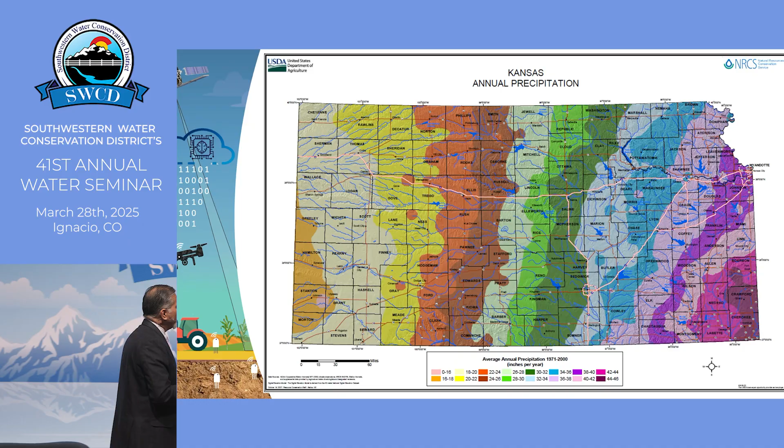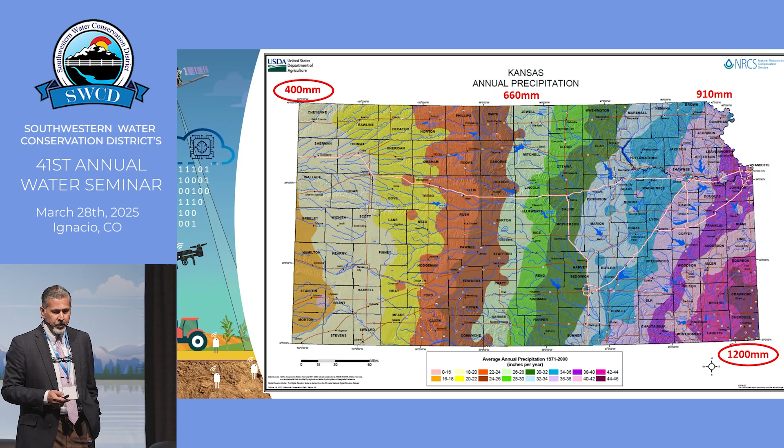My clicker is coming back to me. What I want to share with you is the precipitation distribution in Kansas. It goes from, forward please, low 400 millimeters, so that's just 10, 11, 12 inches, and all the way very high as you go east. By the time you get to southeast Kansas, it goes up very high to 1,200 millimeters, so we're talking more than 45 inches of precipitation. But as you come closer to Colorado, you all are very familiar with that, and that's not different. Wheat is one of our major commodities.

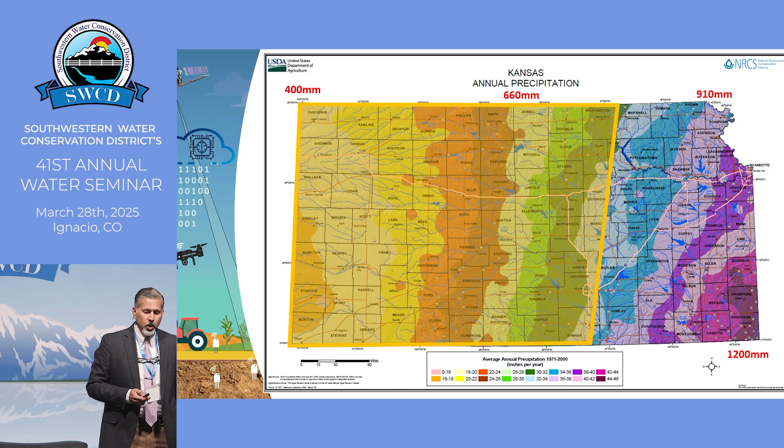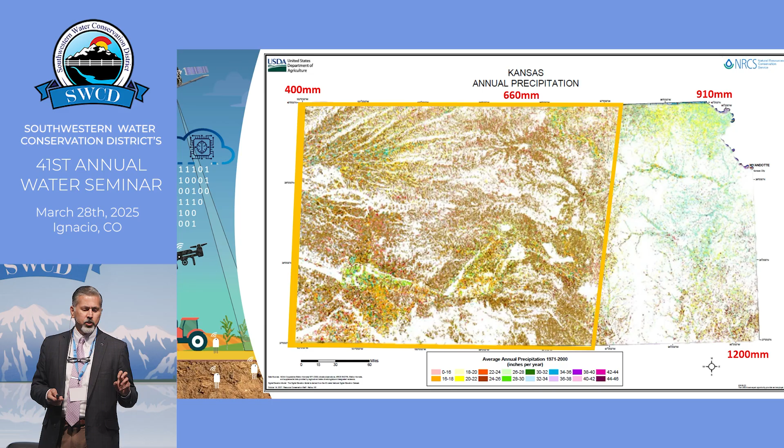But I want to share with you where wheat is grown. Wheat is grown in the western half of Kansas, and that's where it's water deficient. But we happen to be sitting on the Ogallala Aquifer, one of the world's largest freshwater aquifers, and you can see by looking at these pixels, these are the GIS pixels where wheat is grown. And this is the current status of Ogallala.

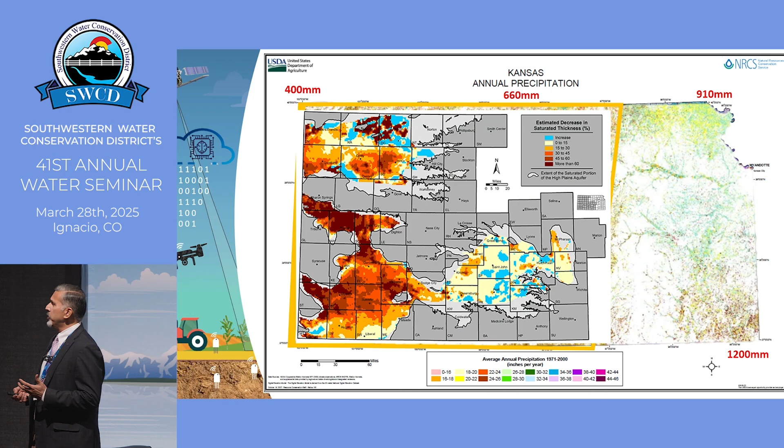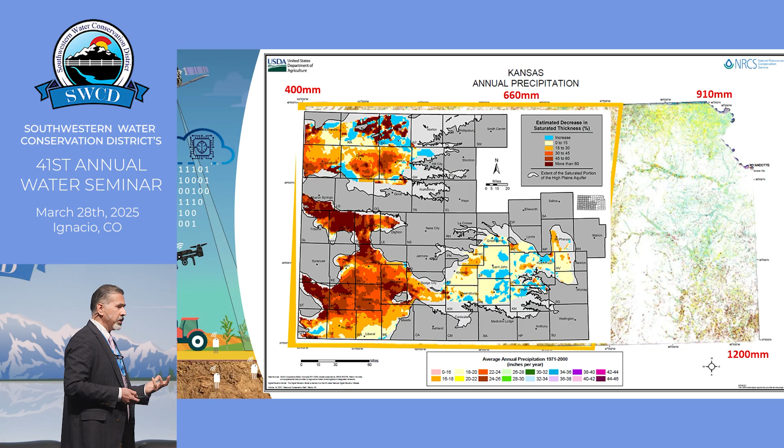So water is very precious for Kansas as well. I know water is very precious in Colorado, I have learned that very carefully. So all the dark brown and orange that you're seeing, that's where Ogallala has receded more than 60%. And when you think about the frequency of droughts that we're experiencing right now, it's not going downward. So something's got to change. What would that look like?

Okay, so precision agronomy or best practices are very important to Kansas. In fact, agriculture is our largest industry, 42% of GDP relies on agriculture. These are some of the commodities that we grow. So I just want to set the stage that water is important, not only in Colorado, but in many other parts, and it's a precious resource.

I'm now going to switch gears and ask you to imagine. I want you to imagine how agriculture may look like in 25 years from now, by 2050. What would be your answer? Drier.

Moving north. Smaller. Resilient. Now we have some optimists in the crowd. Resilient, that's what we're talking about. Well, none of us have a crystal ball.

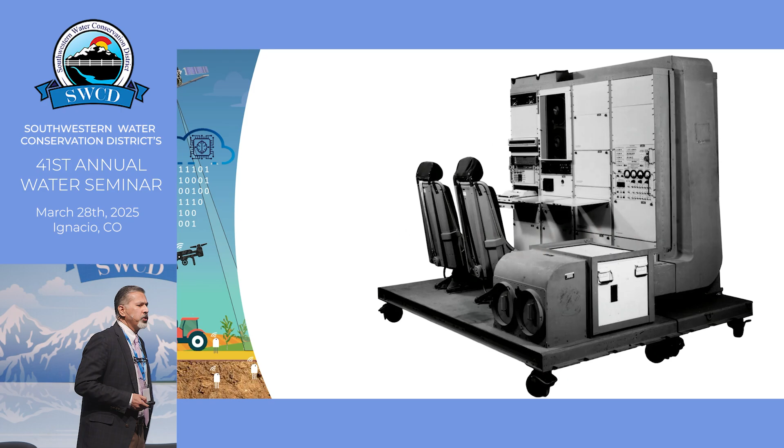It's very hard for us to predict what's going to happen in the future. But Elaine and the organizing committee reached out to me to talk about how we're going to embrace artificial intelligence in agriculture. So instead of looking into the future, how about we look into the past? Here's a picture for you.

You have to speak louder. I heard somebody say computer. Yeah, and it has wheels on it, so it must be a mobile computer.

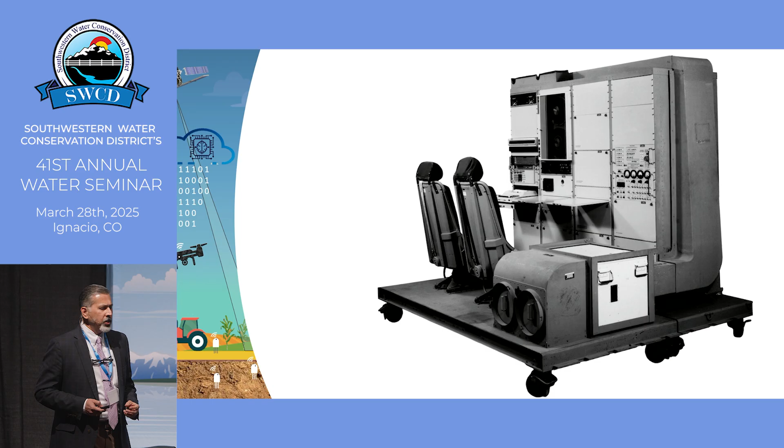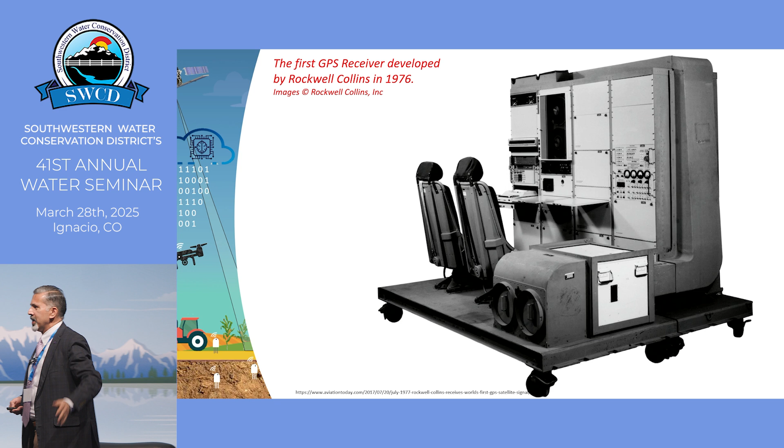Well, it turns out that this is the first global positioning system receiver that was put together in 1976 by Rockwell Collins. Now, how many of you use GPS? Come on, everybody's carrying that in your pocket. Even the scientists at NASA had no idea that in less than 20 years, this one GPS receiver would fit maybe one on the stage, and now you can hold it on the tip of your finger.

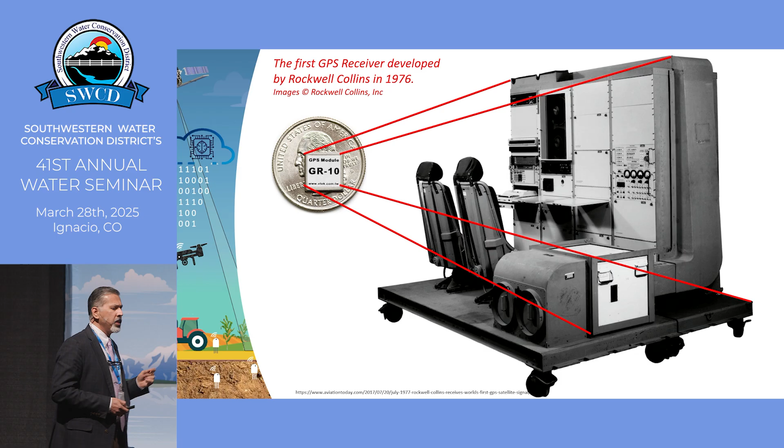And if you bought a cell phone after year 2000, it's there. It's everywhere, right? It's in your cars, it's in your cell phone, and lots of other things. So this is one of the first units that were put together for military warfare, a GPS unit used by our soldiers. And this is one of the makeshift units.

This is me working in northeastern Colorado, late 90s, using a Trimble unit, and I have a tackle box on the back with multiple deep cycle batteries. I'm wired up myself, wearing a Velcro belt with the analog data logger in those days, and I'm using an RS-232 port to connect that to the GPS, going across the field measuring nitrogen stress in crops.

Well, we have come a long ways since then, haven't we? Somebody said resilient.

Everybody knows Einstein, right? And he said imagination is more important than knowledge, and I couldn't agree more. Because think about it, what started as an idea in the late 1980s was put together by this person who's the father of precision agriculture, the late Dr. Pierre Robert.

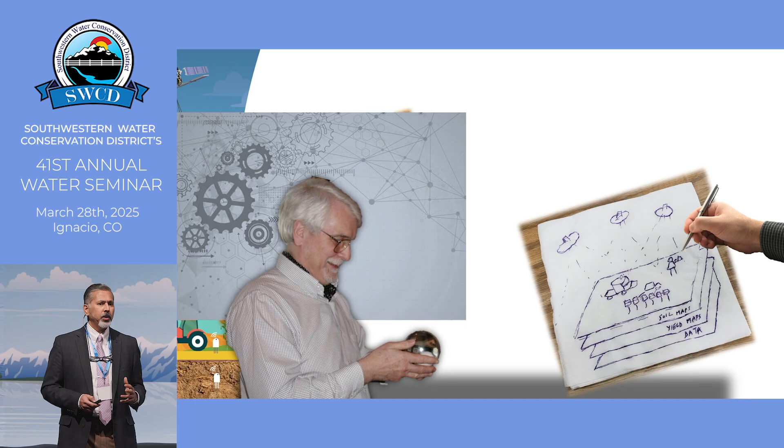In a meeting like this, during that time, there was a lot of talk that GPS is going to be available for civilians. And so the thought process was that one day when GPS becomes available for agriculture, we're going to connect everything that we do in agriculture with GPS. And then this schematic from a napkin was put together by a designer, and this has happened. What we're doing in agriculture today has connection to GPS.

Location is important. But the founders of GPS cautioned us. They said when you start doing location-based agriculture, you'll be collecting lots and lots and lots of data. And they're right.

Today, for those of us who are engaged in agriculture, whether you know it or not, you're collecting lots of data. Whether it's past year yield, or what's in the soil, or different soil profiles, there's a tremendous amount of data, and I'm going to show you some examples. So as you look into the future, data and data analytics will be integral for the success of agriculture.

Some of you may have read the USDA Agriculture Innovation Agenda that came out in 2020. It talks about how in the next 30 years, by 2050, we're going to increase our ag production by 40%. Now, how many of you think we can get there? Show me a raise of hands. Okay, there are some pessimists in the crowd.

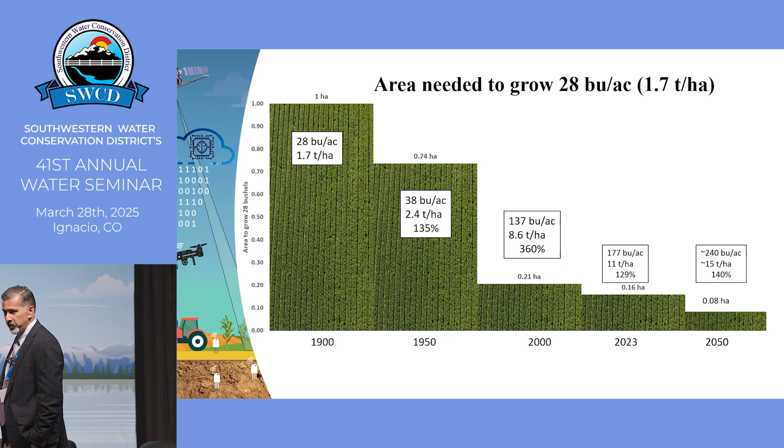What has happened in the last 25 years? It has come down further. So to translate this into what the USDA Agriculture Innovation Agenda calls for, by 2050, with 50% less water and 50% less nitrogen—this is a very tall ask, but we have to be ambitious. We have to aim higher. How would we get there?

And this is where I put as a hypothesis, could artificial intelligence play a role in helping us bridge that gap? How do we get there?

Let's take a look at what is intelligence before we talk about artificial intelligence. Intelligence is our capacity to retain a tremendous amount of observations, use our logic that we come up with from observations, emotional intelligence, learning and observations, more observations that we continue to integrate. And it starts right from our childhood. Our ability to fit through shapes and sort them, which comes with observations, sensing, ability to read, ability to write - this is all where intelligence is being formed in our mind. Ability to walk, ability to bike, observations, learning, logic, abstraction, ability to solve problems, ability to solve complex problems. It's total observations all the time, infusing logic into that.

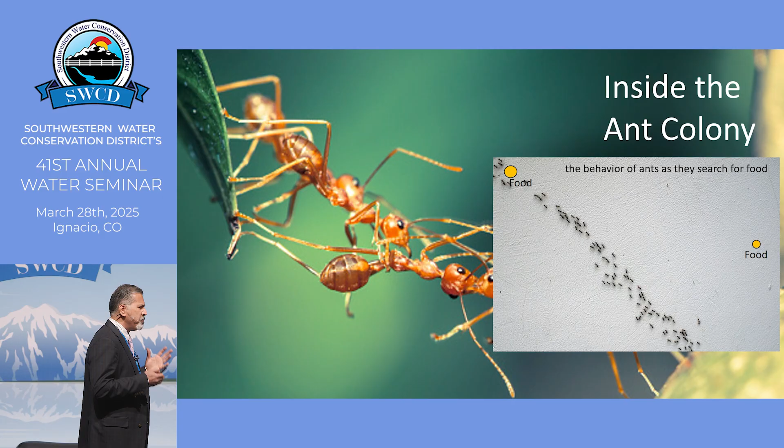And we're not the only species that's gifted with intelligence. There are so many other animals - for example, how ants will navigate towards food in a very organized manner, or elephants, dogs, pigeons, orangutans, crows, pigs, dolphins. The list goes on. Last year there was a paper published in one of the world's top journals of science.

But Alan Turing, the father of artificial intelligence, started this whole paradigm: can machines think? And what would that look like? He started in 1950 a totally new domain of intelligence called artificial intelligence. And of course, computers are machines, and the idea there is that can they mimic human behavior?

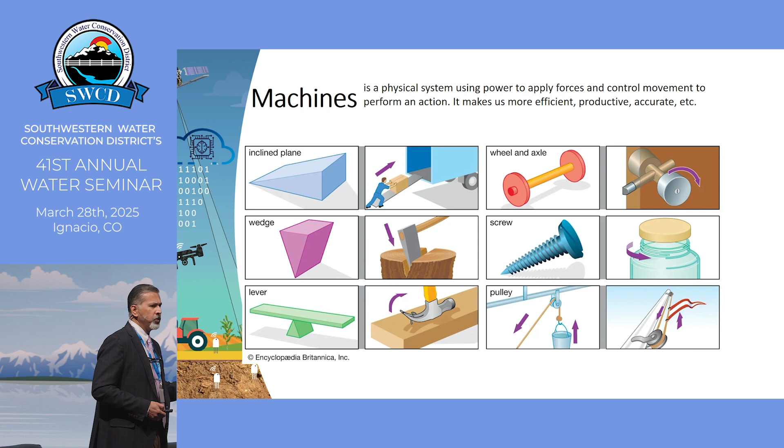That's the key question. And our fascination for machines is not new - all of these are examples of machines. How many of you knew that the glass sitting in front of you is a machine? You go to a river, you're thirsty, what are you going to do if you don't have a glass? It allows us to do more, right?

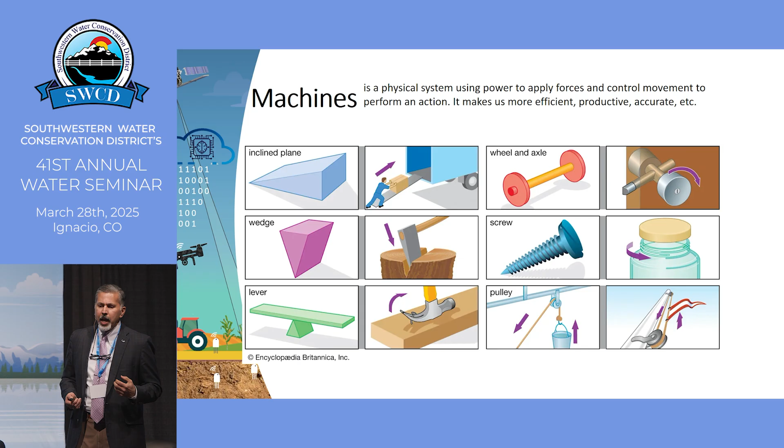So here are some 21st century machine examples being used in agriculture. Most of them are robotic farms, and they're mainly focused on weeding. Farmers have very little tolerance for weed - it sucks up your water and nutrients and so many other things. Most of them target weeds. This is Carbon Robotics. I've observed a whole herd of these, at least in California, in high-value crops. So I have a short video here.

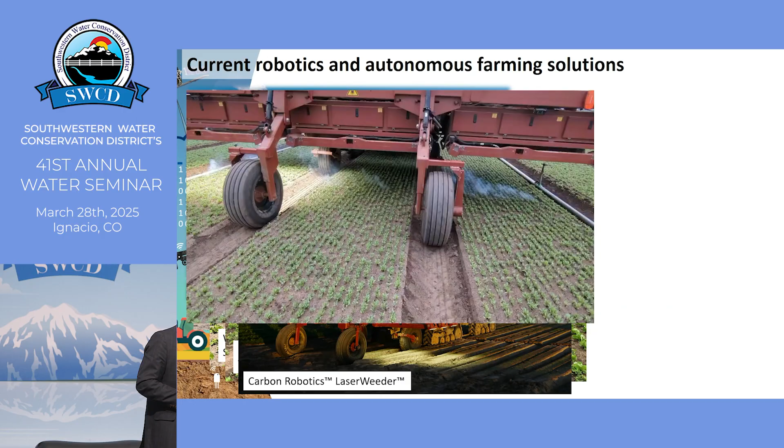It's all right. So the machine has what's called 3D vision - don't worry about it, Elaine. It has a 3D vision, I'm sorry. And so it's looking at - they took a lot of data without any laser.

And they specified the object of interest - could be lettuce, a carrot, a radish, whatever that be. And then they also take three-dimensional images of everything else that the camera is observing. Then somebody has to sit through it - before artificial intelligence happened, there's a human intelligence part. Somebody has to sit through and look through all sets of those images to tell this is lettuce and this is something else, and something else needs to be zapped. Because you don't want to be zapping lettuce, right?

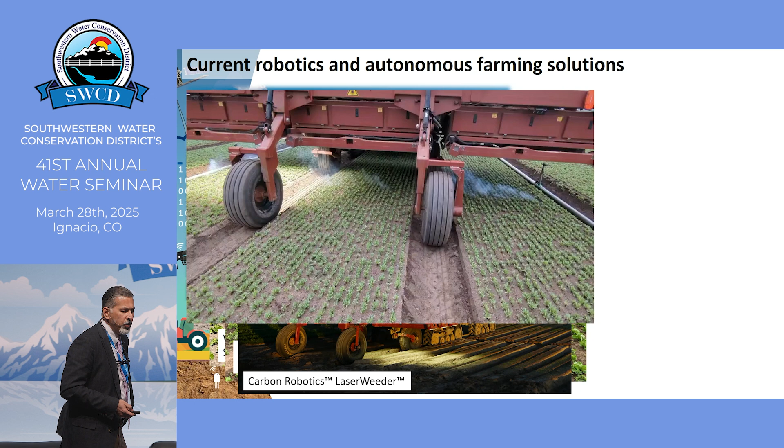And that's exactly this - the video is showing you in motion exactly what it does. It has a very close to 100% accuracy rate. But then there are some other ones performing many other different functions important for vegetable crops. Right now they're being used in horticultural crops, but soon it will be used for row crops.

Okay, I want to show you this one - I know it's coming from Florida. This is a totally autonomous spray system that can run 24/7. It incorporates fumigation of the orchards, so there's no human intervention - you can place it, and it can work day or night.

Where are these machines coming from? Well, this happened to be all two years back at the robotics show in California. If you haven't participated, if your time allows, go and take a look at what they're working on. But our fascination for robotics is not new - this is a 1957 movie.

Hang on. Okay, just click anywhere and then don't do anything.

This is a 1957 movie. So the farmer and his significant other are constructing a vision that in the future we'll have machines that are totally autonomous, and they were envisioning it would look something like this. Not just one or two machines, but a whole herd of machines that can go through the field. And this is 1957.

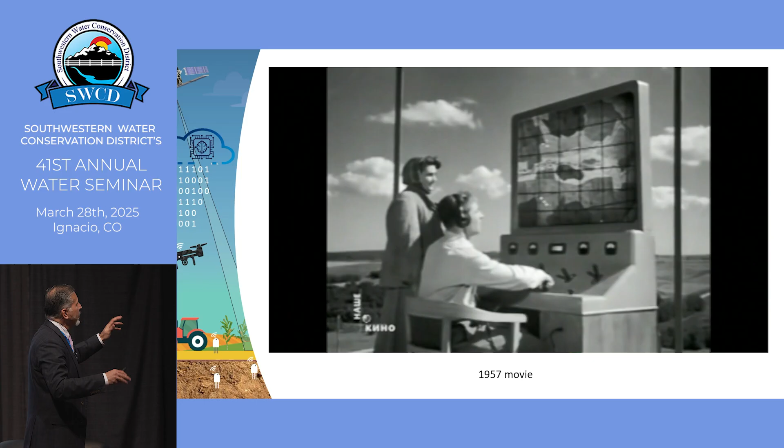Of course, there will be towers. He's looking at the spatial map, the distribution of heterogeneity in soils and crop, and then it will start flashing somewhere. So they say, hey, there's a problem there. And so he's going to throw his hands up in the air. You see, he's concerned right now.

Right there. And then he will send a signal to the machine to fix it. So our fascination with robotics is not new.

This is my very good friend and colleague. He's no more, he passed away last year. Dr. Simon Blackmore, one of the iconic figures at the University of Harper Adams, who did a lot of work on robotics and automation. In Denver, not too far from here, in 2008, he was the opening keynote speaker for the International Conference on Precision Agriculture. And he talked about how in the future there will be a whole swarm of robots going through the field. And he was right.

In 2017, 8 years back, at Harper Adams, they made a press release, some of you may have read this, the first hands-free hectare, 2.5 acres. They grew 2.5 acres of barley from seedbed preparation all the way to harvest with no human intervention. Now, this is the most expensive barley on the planet, I get it. But they proved it in 2017. In fact, at Harper Adams, they are still running the hands-free hectare farm where there's no human intervention. I've been there, I've seen it myself.

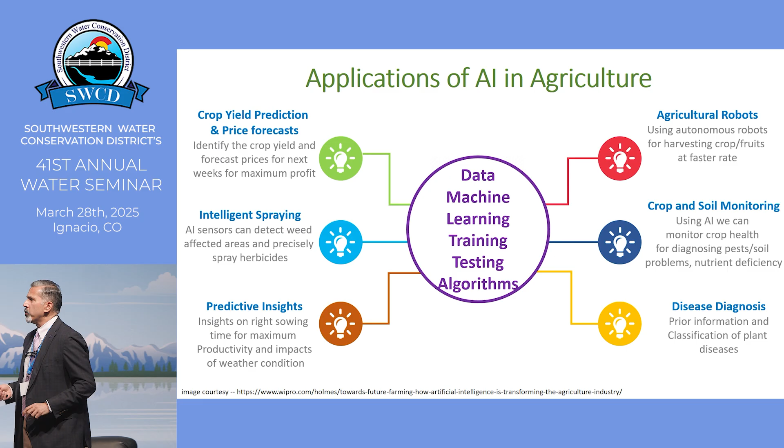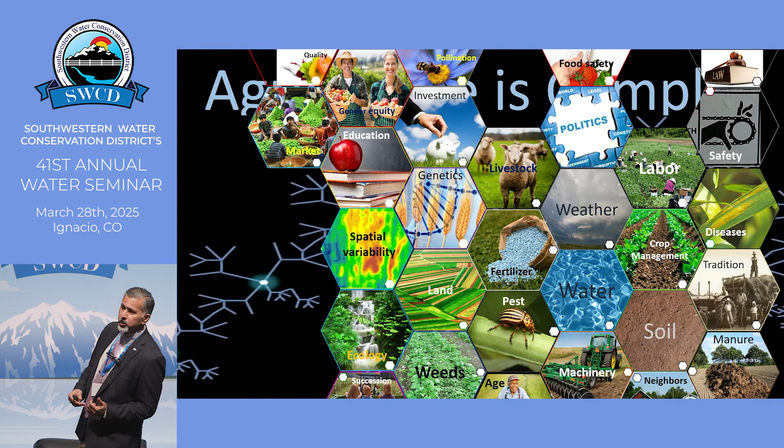Okay, so agriculture is complex. Do we have a consensus that agriculture is complex? Agriculture is complex because it has so many moving parts. If you're working with a row crop, you're given 100 or 120 days to make all these decisions with genetics, water, soil, marketing, spatial variability, machines, market pressures, what my neighbor is doing, what I learned last year. There's so many moving parts in agriculture, like how much am I going to apply, where, when, whether it's water or nutrients. So all the complexity is put on the farmer, the producer, with such a significant expectation of being a champion of sustainability, but you have very limited choices.

You've got some machines, just like this one. In this case, this has a GPS on it. But we're looking at agriculture through the lens of a machine, and that machine is a computer. Now, a computer only understands the language of zeros and ones.

And that's captured in the form of data. So the computer will only be as good as the quality and quantity of data that's being infused into the machines. Going forward, there will be a huge amount of data collection that must happen, that must be trained, and the machine has to learn that. Robust algorithms need to come through, and this is only a partial list.

So what do you do? You put all of that onto a cloud server. Just like when you take a picture from your phone, it goes to a cloud server so you can share it with your family. It has to go to a cloud server, and it doesn't matter whether you're an Apple user or some other platform - it has to talk cross-platform. And as a producer, you could be standing anywhere in your field or in your office, but you have to have access to the data.

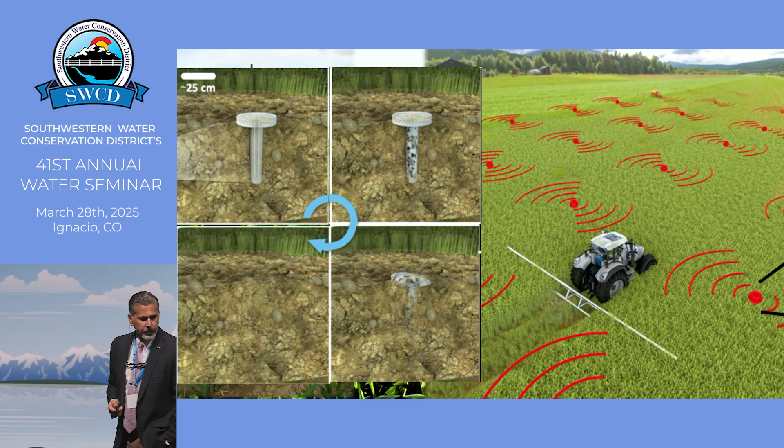Likewise with plants, right? We want to spoon feed the plant, not quite one plant at a time, but maybe close to the plant. So this is a prototype that in 200 days basically dissolves in the soil. There are also in-planta sensors that people are working on.

I'm going to show you some real examples. This is an in-planta sensor that you can actually just paste on the leaf to give you parameters of interest.

And what is it that we're trying to do? We're looking at soil heterogeneity and the limited amount of water that we have, understanding how weather and climate behave at each location, collecting a lot of data, using technology for crop management. So that goal has not changed.

So let me just talk briefly about the sensors and sensor technology. I'm sure you've heard we can only manage what we can measure. And if water is what we're trying to manage more efficiently, we need to make sure we can measure it, right? We're at the cusp of a revolution when it comes to sensing technology.

What's happening going forward is that these sensors are going to be rapid, reliable, diagnostic. So it's not a surrogate measure that we think this is, but it's diagnostic. And it will be in place, in planta.

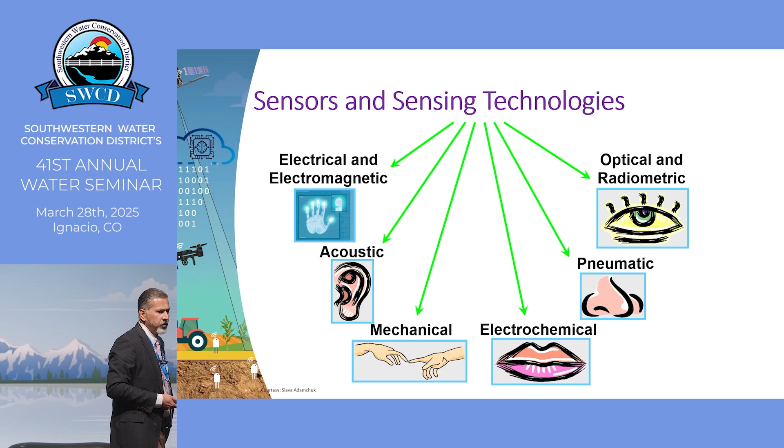But think about it, these are the scientific or technological names, and that's what these are. Early and asymptomatic stress detection.

So let me ask you, how many of you believe that plants cry for help? Anybody in the audience? Oh, quite a few people. Well, that's the hypothesis of one of our colleagues in Israel.

They worked with tomato plants and imposed 3 different types of stresses, using an acoustic sensor to quantify that. Number 1 was soil moisture stress. Number 2 was physical stress, and number 3 was radiation stress.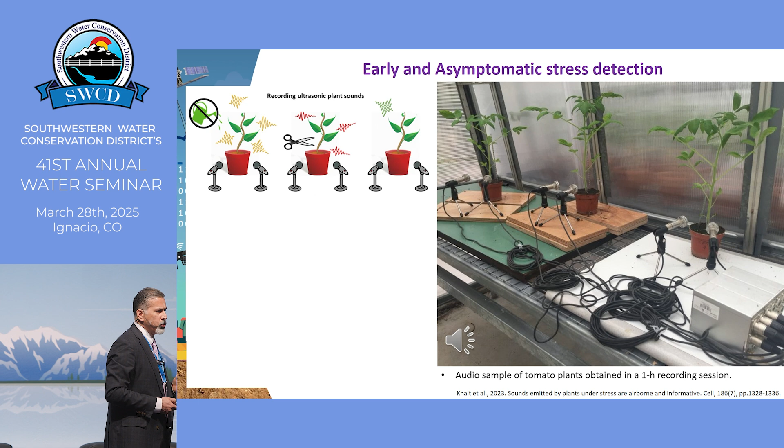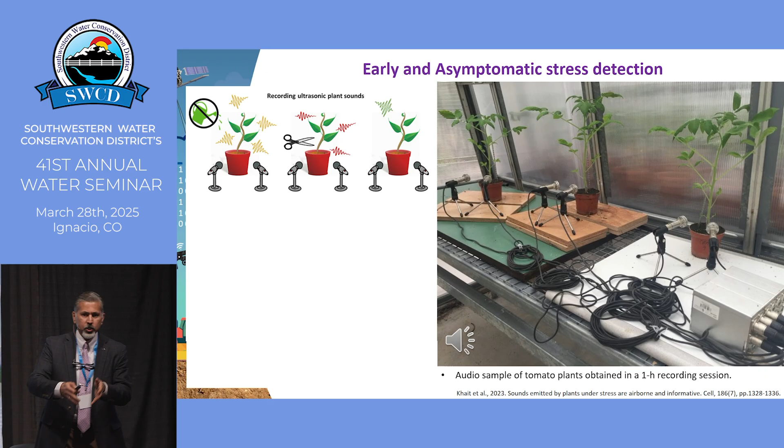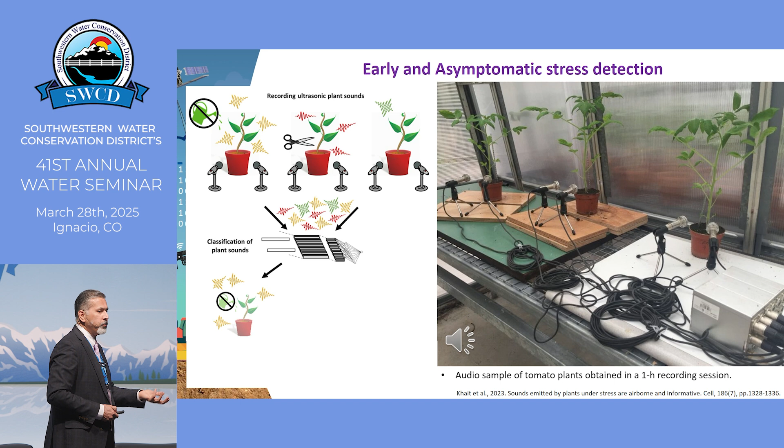In life, these stresses don't happen one at a time, they happen all together. So what they did was study the data from causing stress to the plants one at a time, then commingled the data together and fed it into neural networks, what's called machine learning and artificial intelligence. They were able to accurately detect the pattern or source of stress every time, whether it was from moisture, physical, or radiation stress.

And there was a signal that I know we can't hear. The video and sound isn't working very great, but that's all right. You get the idea. Here's another group.

This is from North Carolina State University. They have these in-planta sensors that measure the stress signal given out by the plant when diseases happen, because there's a change in the volatile compounds just in the proximity of the leaf, which happens 3, 4, 5 days before the symptom appears on the plant leaf.

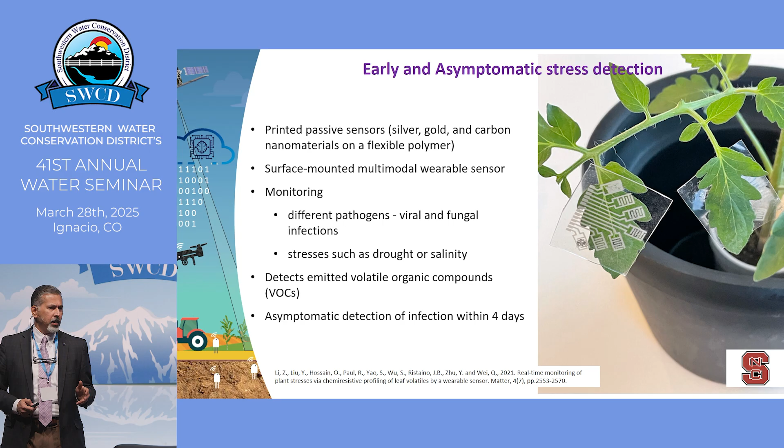How about that? So they can detect the virus or pathogen that's going to infest the plant and cause the source of disease. How about that? You as a producer, imagine knowing 4 or 5 days ahead of time that a set of plants are going to be exposed to a fungal pathogen that might kill the entire crop.

So it's coming. These are basically based on printed sensors. I didn't know there's a field called printed sensors. In fact, I didn't believe it, so I went to the lab and saw it. You can use conductive ink to literally print sensors.

And so we've been working in this field for the last 7 years. We screen through a whole bunch of degradable material, then do a lot of analysis in the greenhouse to make sure it will last through our plants' whole generations, and what happens to that. And of course, damage happens to the sensing devices, and we've published papers on that. This is an example of a soil moisture sensor.

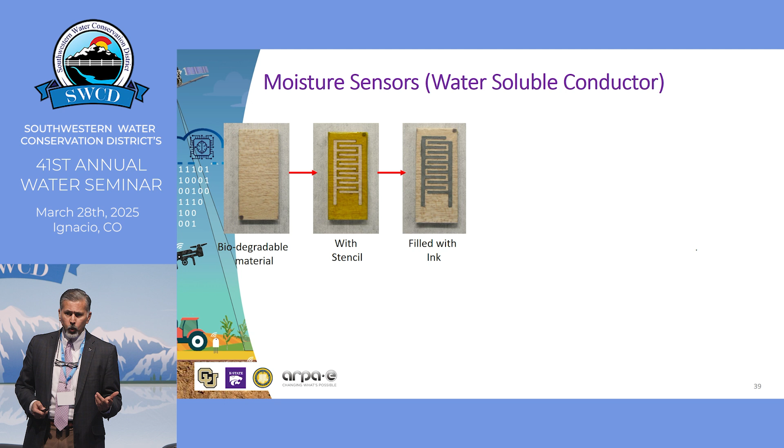So you take a biodegradable material, and then you create a stencil, and print them with a conductive ink, usually silver or gold, but don't think you'll get rich with that, okay? It's a penny sensor. It's a very thin layer of conductive ink, and then you etch it with acid so it becomes conductive, and you attach wires to that, and encapsulate it, and add a circuitry board. That's your soil moisture sensor.

It's pretty easy, and of course we do a lot of testing with wired sensors before we take it out to the field. Starting this year with Dr. Cabot's help, we're going to create a test bed of these wireless sensor nodes, 24 of them, at 4 locations, 2 in Kansas and 2 in Colorado.

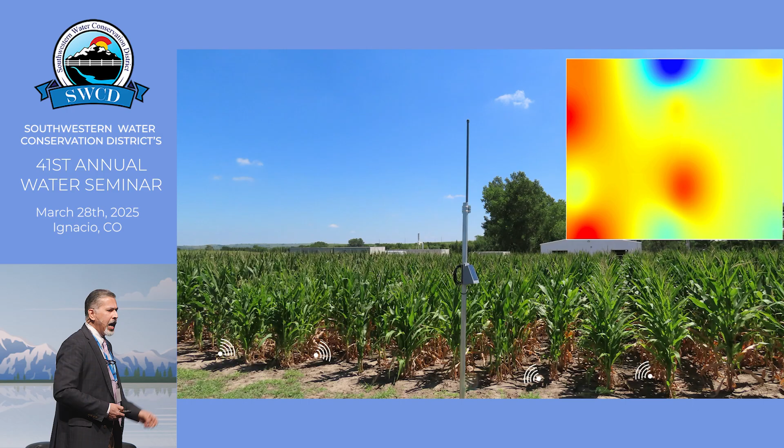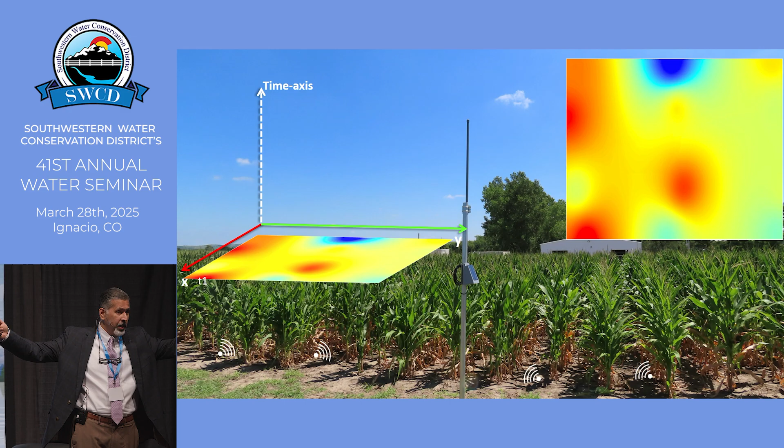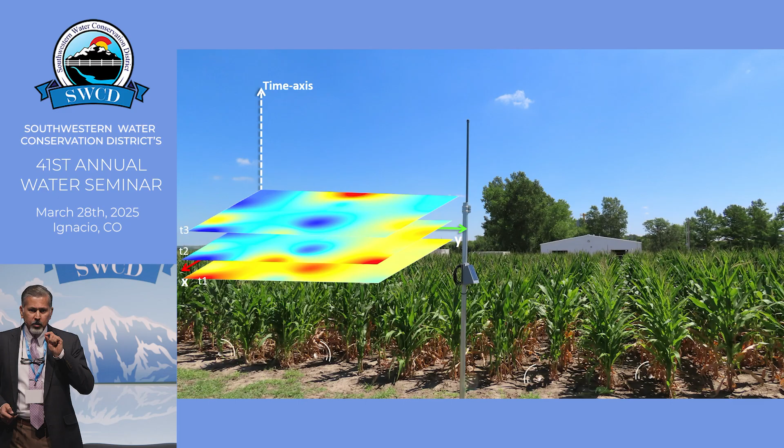And so now what you're dealing with, you have an X and Y and Z depth, and time T. So you're dealing with a 4-dimensional data set, right? It's like when a dog catches a car, what are you gonna do with it, right? That's the paradigm we're in. We're collecting so much data, and we don't know what not to collect right now. You can collect this data every 30 seconds, every 30 minutes, every hour, just the way you want to program it. But there are so many questions related to that: how do we integrate this data? What does it really mean?

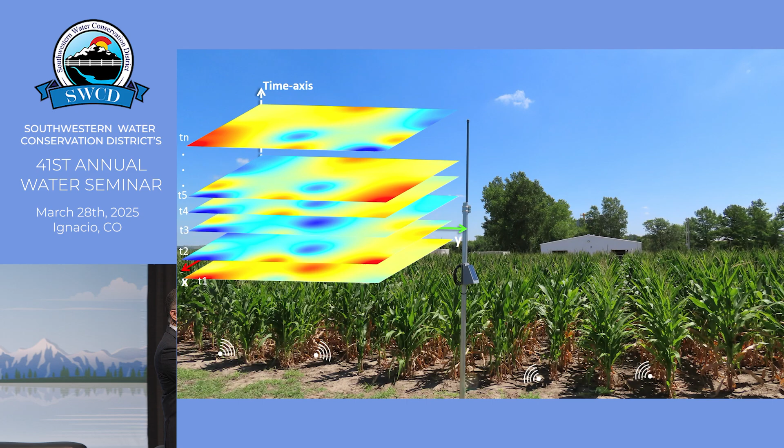We've also installed a precision lateral at the Fruita research station where you can control the level of water at every nozzle level, and we're trying to develop a prescription map.

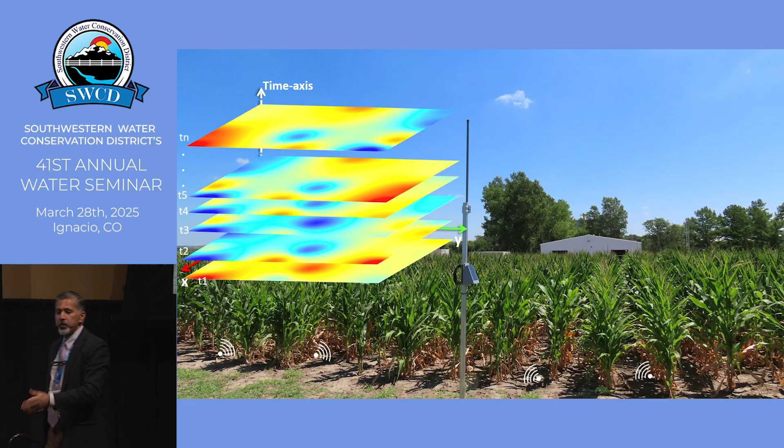Let me show you. This is the Fruita location where we're doing this work. This is the particular field, about 12 acres in size. And so we go out and measure the heck out of it because we don't know what not to measure right now.

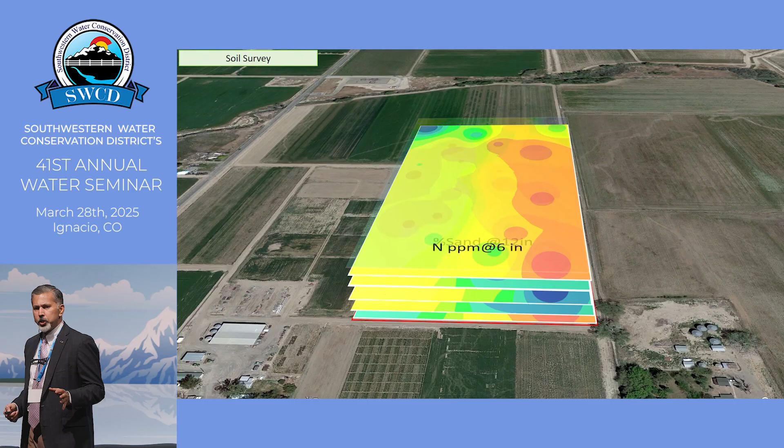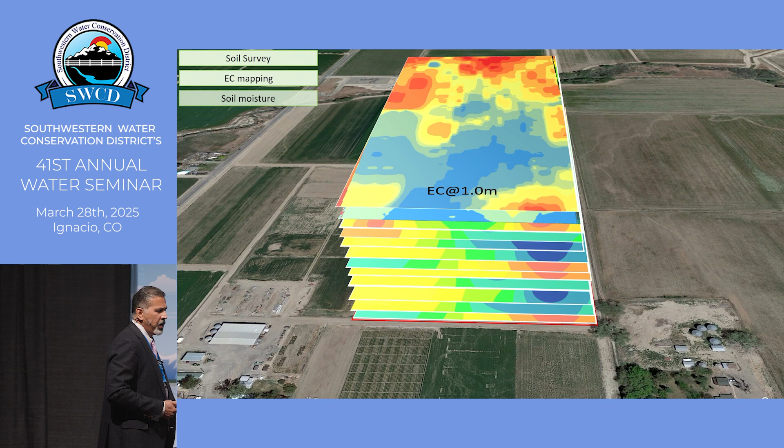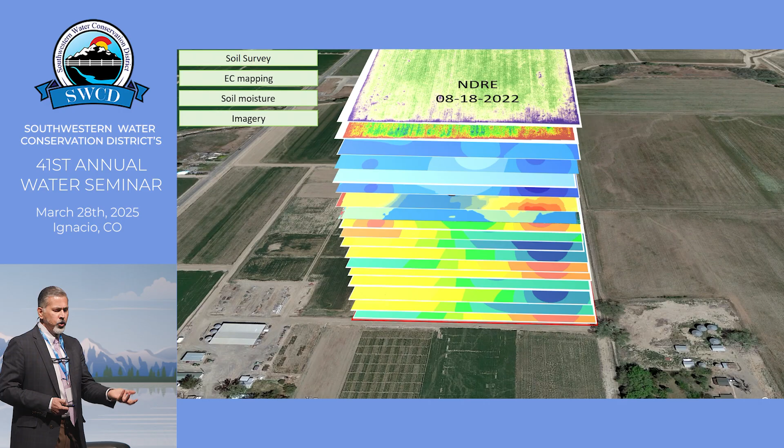And we start stacking those data layers. We do electrical conductivity - these are all soil parameters, but a soil moisture sensor system that we have been measuring the hard way, but now we're going to measure the easy way. Of course, the crop canopy through satellite imagery and UAVs, and lots of crop biophysical parameters, all related to the yield.

So when you collect this much amount of data, it's beyond human capacity to really query that data and translate it into a prescription map.

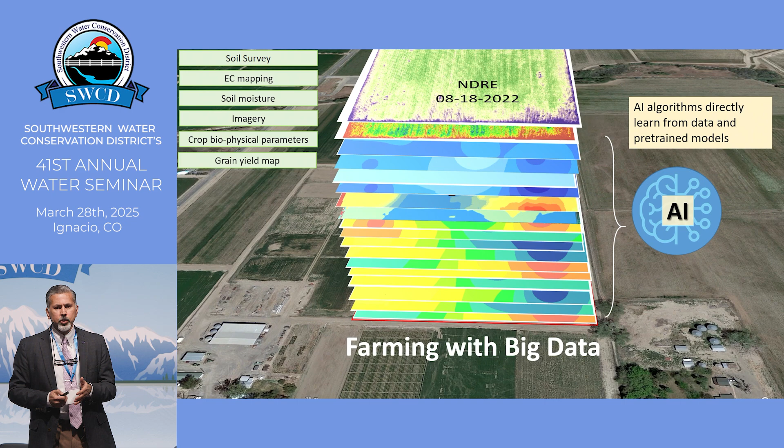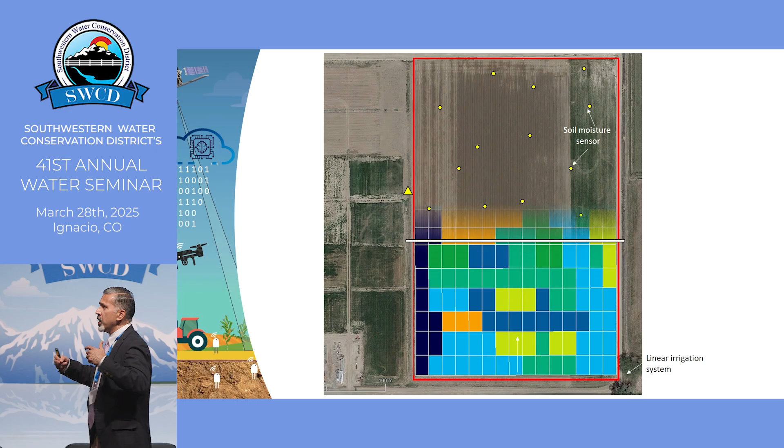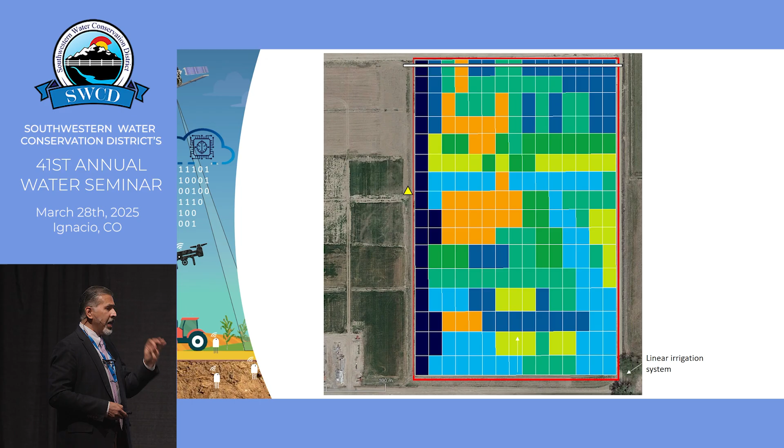So this is how the soil moisture sensor network will be distributed in the field starting this year, and we have a lateral. The idea is that the sensors talk with this lateral that's going across the field, changing the prescription of how much water needs to be applied, and where and when, at every nozzle level, so that we apply the right input at the right time, at the right place, in the right amount.

So this is my very last slide. I want you to imagine what we're trying to do, and I couldn't figure out the best way to convey my message. So think about you talking with your smartphone, which is enabled with the algorithm that our students and postdoc are trying to develop.

So you say, hey, when should I irrigate this cornfield? That's you asking the AI part, right? And using the algorithm running in the background, it says, hi Carl, let me ping the soil moisture sensor network, weather data, and it instantly creates what's there. Hey, we had rain 2 days back, so in the next 2 days the crop needs this much more water. So he says, you can consider irrigating tomorrow.

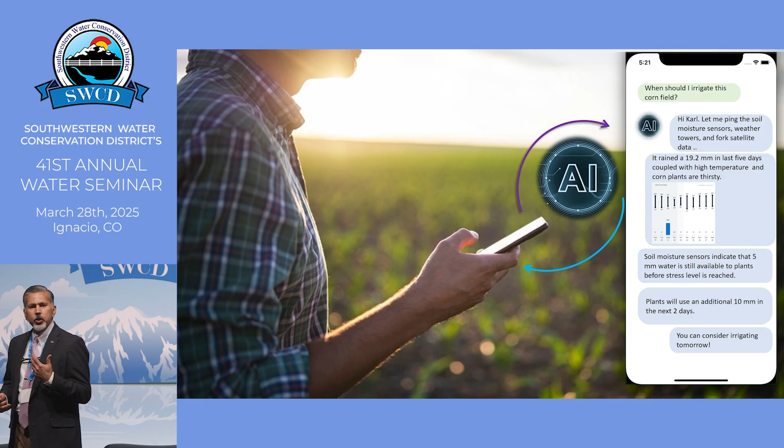Okay, so then Karl says, how much water to irrigate, right? That's a fair question. He says about 1 inch would be sufficient. And then he says, well, I need a prescription map to upload it. There you go - almost instantaneously it creates a prescription map and gives it to you, and then you say, hey, go ahead and upload it on the system. All right, he does that.

Now listen, this is AI. If the AI is working correctly, it'll say, hey, do you want to fertigate the field? He says, no, I don't want to fertigate the field. It says, do you remember what happened last year? That corner of the field, you lost 20 bushels over there. You still do not want to fertigate? Karl is scared now, right? Okay, then upload the prescription. And so it's uploaded and it says, set me a reminder. Thank you.